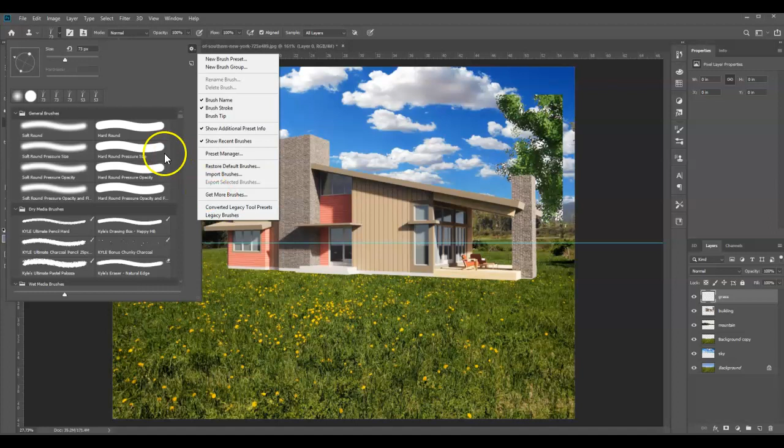That's going to put something down in here. So you're going to scroll down and eventually you'll see legacy brushes, which is right here, and it might be collapsed like that. If it's collapsed, just hit the little arrow to uncollapse it. If you need to, uncollapse the default brushes and scroll down. It's going to be a little ways down because this is a big long list of brushes, but if you scroll down, you'll eventually see grasses. Here we go, grasses right here. I'm going to use just regular grasses, and you can click on it.

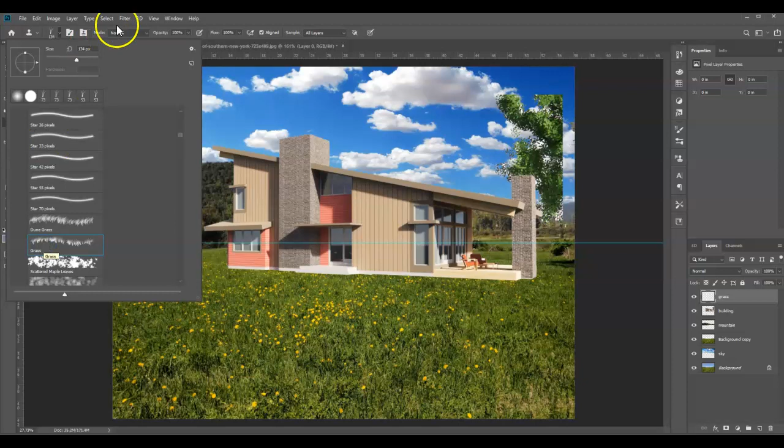Okay, so that got our brush set up. That's going to help us paint in a grass shape. Watch this - I'm going to just click here. I'm going to do it up here. You don't have to do it, it's just for demonstration. You can see it looks sort of like grass up there.

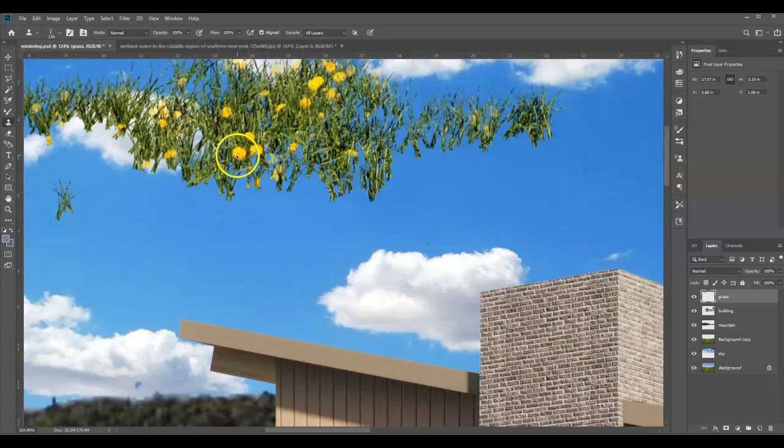Now part of it is the clone stamp, and part of it is the paintbrush. The paintbrush is the fact that it looks like grass blades - that's the paintbrush. The fact that it looks like a bunch of greens and dandelions and all that good stuff, that's the clone stamp.

Clone stamp basically sets your target and paints whatever it sees down here up high. The reason why we need that is because if I were to say, what color is grass, you'd say grass is green. But really, if you zoom in on the pixels, it's hundreds of shades of green. And so we need to be able to paint hundreds of shades of green. You can do that if you have some grass - you just clone stamp it right up.

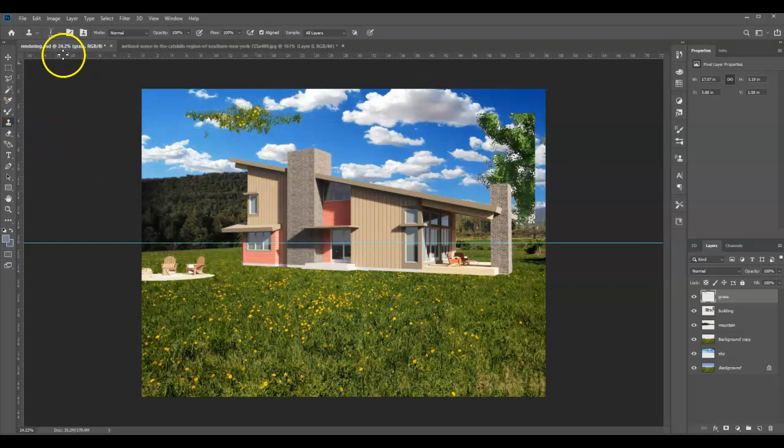Now, clone stamp is a bit tricky to use. Once you get the hang of it, it's super easy to do, but it does take a few steps, so pay attention. The first thing we want to do is get the size of our brush right. You can see how big my brush is here - that's too big, it's too large for painting down here. So I'm going to change that, make it smaller. I think probably around 80 in my case will work roughly. You'll have to set what works for your image - it could be different. Oops, hit the wrong layer there.

And then you can always give that a test. Now, the thing about clone stamp - I'm going to continue this demonstration here in a test mode. The way it works is you hit the tool, then you have to come down over what you want to copy.

So I want to copy grass, and I have to press Alt on my keyboard. Notice that my cursor changed to like a little target because I'm setting the target. So I'm going to click there to set the target.

Then I'm going to move to wherever I want to paint. I'm still testing, so I'm going to do it in the sky. You can see that's why it paints on the sky. And you can see where I had my target, there's a little plus sign moving around showing what I'm copying. And if I get too high...

I'm going to show you this example. If I get too high, it'll go over the building and start painting the building color. So you can see that. That's because I'm too high. So oftentimes you have to keep resetting your target as you're painting with the clone stamp, and I'll show you this in the real demonstration.

Let me just delete this test work here because I had a good paintbrush size, and get to work. So I'm going to go to my grass layer, go to clone stamp.

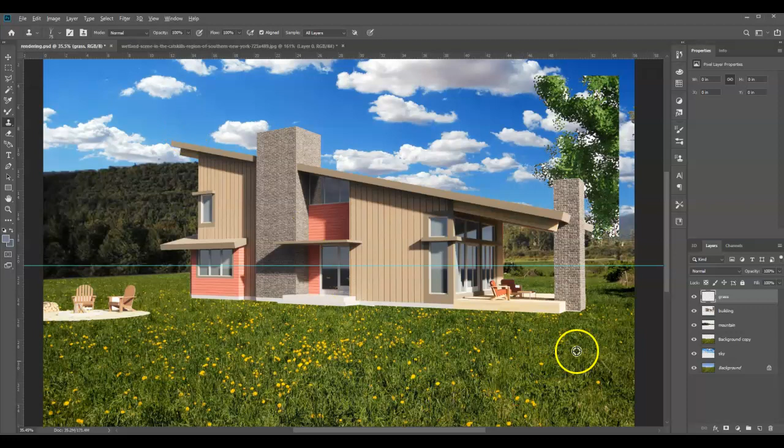I have this all set up. I'm going to zoom in on one corner or the other. I'm going to press down in the grass area, press Alt to set my target, then come up right to the edge of my building and just click and hold, moving the mouse up and down, back and forth, just moving it around a little bit. I'm painting in this edge here. It doesn't need to be perfect, and you'll see how it goes.

And I'll just keep going. And then at a certain point, I might feel a little uncomfortable, I might let go. I could keep painting, I could click again and keep painting. But you'll notice at some point as I move left, my target's going to fall off the screen.

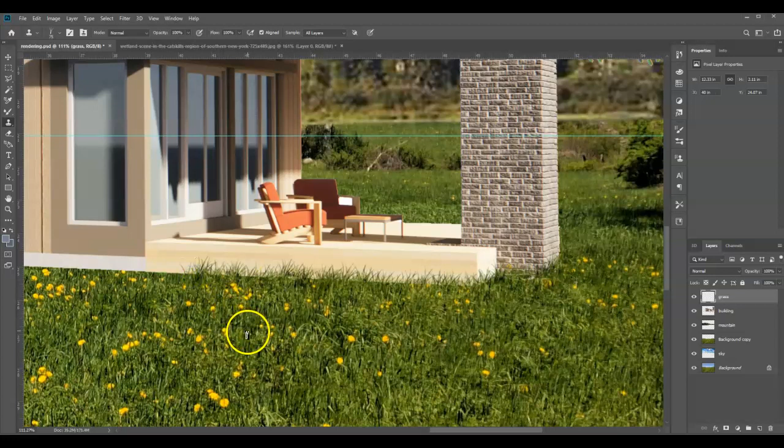So I am going to have to reset my target. I'm going to let go with my mouse, press Alt over here on the midpoint again, approximately, and come over here to paint. It'll start tracking and be able to keep painting. And I'm going to keep going. This will take a few minutes to do the whole edge of my building.

I'll zoom out so I can see, come in over here. Now that I'm over here, I'm going to have to reset my target. So press Alt, click somewhere down there, and paint. Keep painting the edge. Now, one thing you'll notice as I keep going further and further into this perspective, it almost seems as if my grass is getting taller and taller.

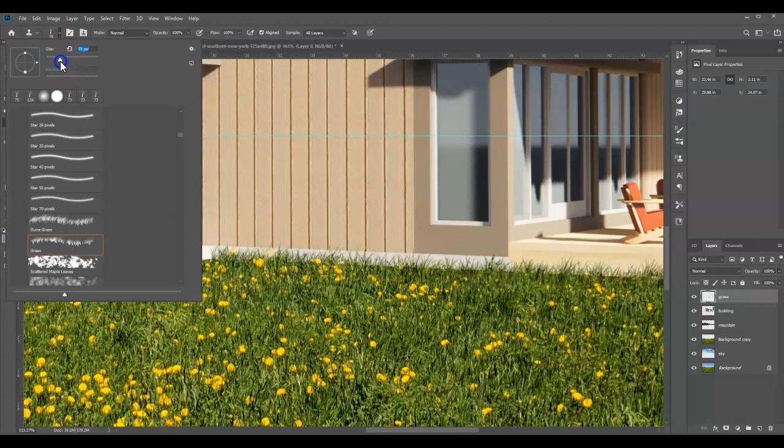So at some point, I probably want to reduce my paintbrush size, and at this edge might be a good point. So I'm going to come in here, just click here, and then reduce my paintbrush size some amount, and then reset my target, Alt, click, paint along the stairs on this side.

Now, in a video or two, we're going to add a path, so I don't need to worry about anything in front of the steps, and that's for any house you're working with, so I can skip that area and just jump right over here to this side, press Alt and click, come up to the edge, start painting.

You can see my grass is looking tall again, so maybe after I do this area that's under the brick, I'll reduce my paintbrush size again, just like this, down even smaller, come down here, reset my target, and paint this down in here along this edge and up the side.

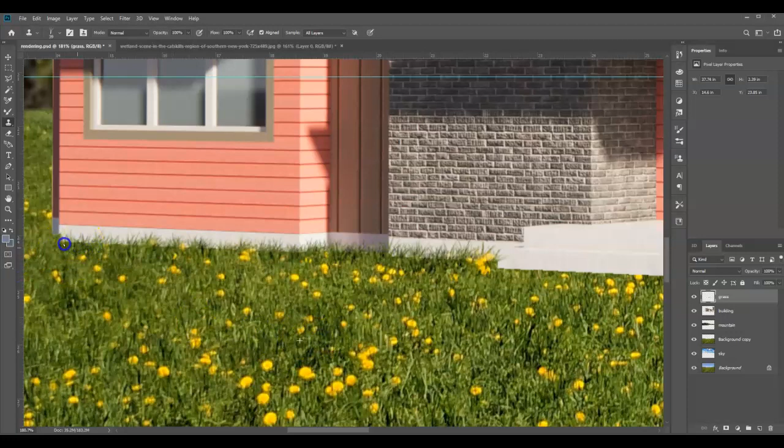And this trick works well with flowers too, and other similar things. We might even see it again. Now, as I'm getting close to the left-hand side, my target's almost off the screen, so I have to reset it down there, and I can keep going and do this little bit in the back here, just like that.

Paint that in. And when I zoom out and look at this house, now it really does. That simple trick, you can barely see what I did, but it adds so much realism to the drawing to make it really feel like this is set in here. Here it is without it, clearly fake. Here it is with it in. You start to wonder how real or not it is.

There's more tricks we can do with our building as we get into this, though. So we'll take more of a look at this as we keep moving forward in future videos.